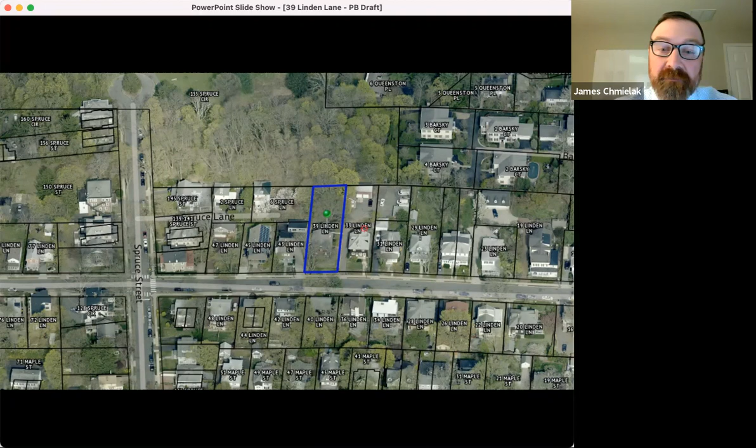And then this is an even closer view of the aerial. You can see the adjacent structures, as well as 33 to the right, which also has some commercial element to it and is multifamily. And then you can see some of the massing of the other buildings there in the local neighborhood.

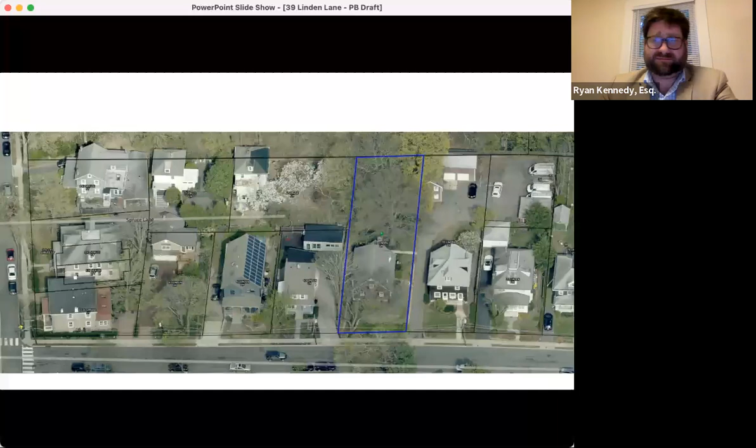Jim, as we get into this, particularly this corner of the neighborhood, there's, from a neighborhood density perspective, many of the lots have been kind of cut up with a front-back feature, where there's a home or units kind of on a second lot behind a half-sized lot that fronts Linden. Yeah, you'll occasionally find that in this neighborhood.

I have a couple slides on the original site plan. You want to just quickly talk about it, and I know future slides show this better graphically, but we'll quickly take us through the original submitted plan. Sure, so on the left-hand side we have Linden Lane, and then the frontage of the building there. The building is approximately 23 feet wide and approximately 80 feet long, with 3 separated units and a proposed driveway on what would be the northerly side, adjacent to the existing single-family residence and their own driveway on the original plan between the property line and the proposed building. We've also provided an ordinance-compliant, from the attached dwelling standpoint, 3 parking stalls at the rear, with an open space area in the lower right-hand corner of the lot in the backyard. This would be 3 units of approximately 1,300 square feet each.

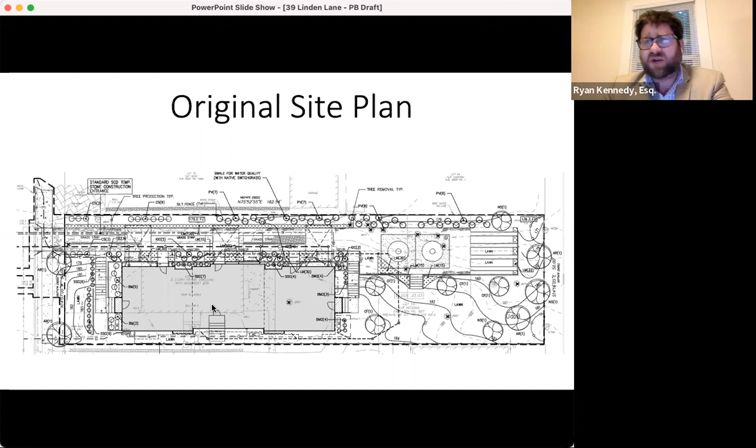It's proposed, correct. Now, I don't want to dwell too much on this original plan. However, there are 2 ways of looking at this type of configuration, and we were guided by staff essentially to look at this as attached dwellings, which has a different zoning set here versus multiple dwellings. But we have here both sets of zoning requirements on this. It makes a difference, I suppose, as to which one it is, but we'll focus on the changes of the project here rather than the specific details of the original plan.

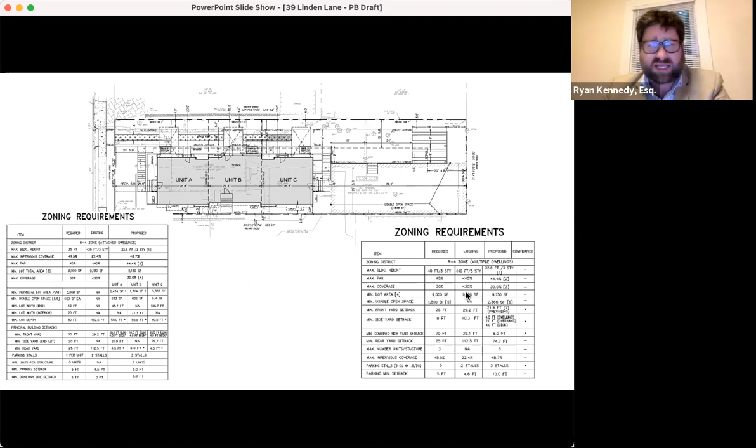But ultimately, on the left, Jim has the zoning bulk table, if you were to look at this as attached dwellings, kind of turned sideways, of course. On the right is what the bulk requirements would be if these were multiple dwellings, treating it as an apartment building. Jim, is that correct? Yes, that's correct. From the multiple dwelling standpoint, we only had a few variances. From the attached dwelling standpoint, they're more significant looking at it in that context.

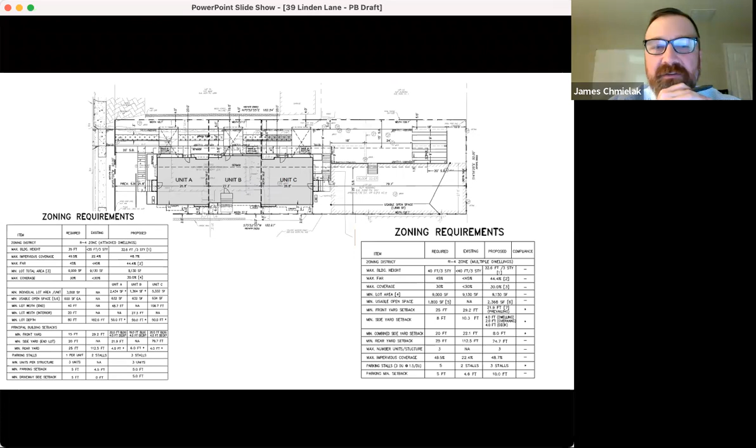So looking then, getting to the heart of what the proposal is, Jim, you want to walk us through the front view?

This was the original proposal fronting to Linden here where these steps are in the front. That was access to Unit A, and the access driveway was to pass underneath the elevated decks on the left-hand side of the structure to the parking area at the rear.

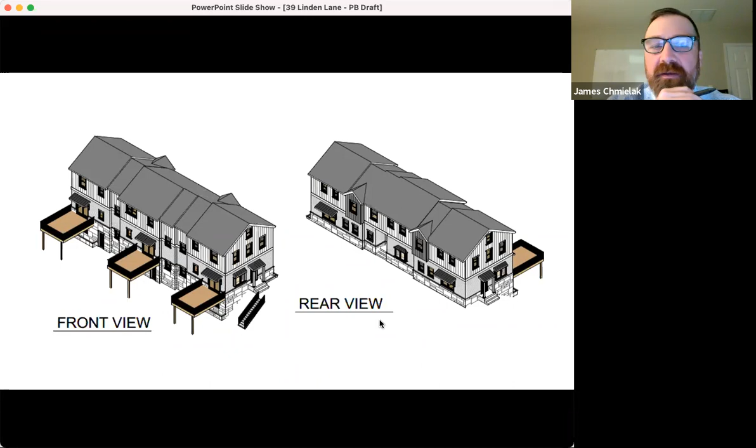Some of these entries, in terms of negotiating the topography with the revised concept, address these particular layouts from the vertical standpoint of the building and the adjacent grade, the facade exposure, and building massing. So this is a good comparison as to where we're going with the modified concept.

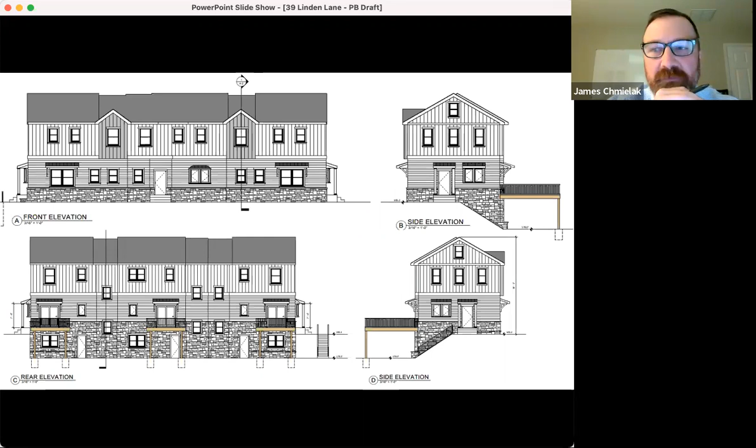Maybe not dwelling too much here, but these are the elevations. I think what's important is that the originally proposed outdoor decks for each unit were proposed to come within 4 feet of the property line, necessitating a side yard setback, and they were about 15 and 16 feet wide depending on which unit you were looking at. That's an element of the revised plan that was significantly reduced, to pull that particular element away from the property line and create some increased buffer space.

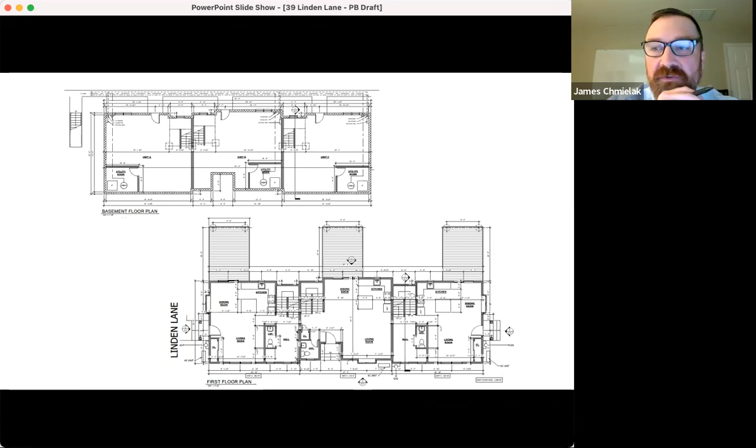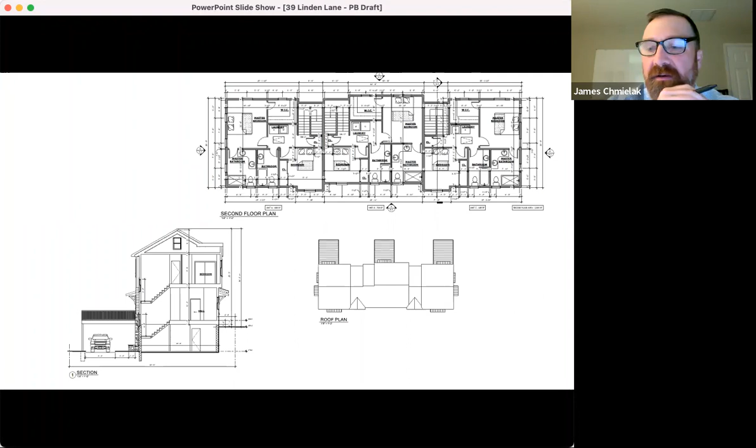There was some concern about having to provide protection on the vertical piers and posts for the elevated decks in and around the driveway, going underneath those decks. With the revised design, that was an element that was pulled in closer to the building and addressed for comparison's sake. So this next slide is a rendering from that front Linden corner.

The one thing you perhaps can't see in this rendering is that currently that's kind of an impossible view because there's a privacy fence along this property line, but it wasn't rendered that way, so you could have an idea of the grade change and the placement of the driveway and generally the materials planned for the property.

So we did, as I mentioned before, attend the last SPRAB meeting, and we had a very healthy discussion with them, including some discussion about things that are still being grappled with as far as ADUs go.

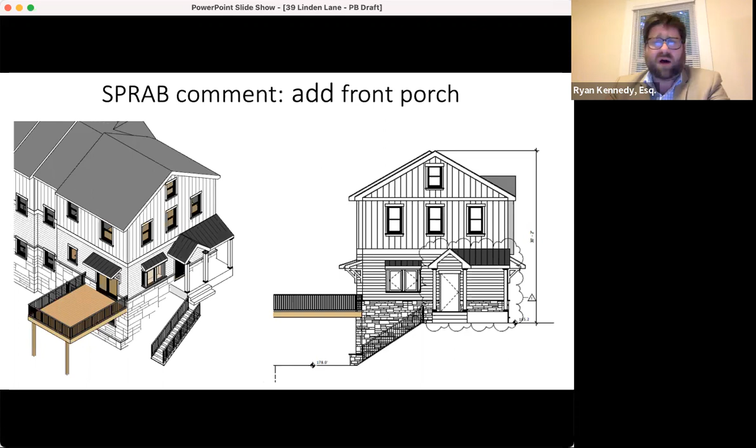Jim, I'll let you talk to this one, the original design had... well Jim, I want to let you talk about this change. Right, so this change was to address the SPRAB comment. Again, we have the porch, expanded in the front. The gable was added to that, and then the footprint was expanded. We extended a more distinct walkway to the entrance on the side.

And then in the rear, specifically, the largest change was to provide 3 stalls facing the rear property line with a turnaround area, so that all the vehicles would be easily able to pull out of the driveway onto Linden Lane in a forward traffic movement instead of encouraging reverse movements. So this change addressed that. That was pretty significant in terms of the comments, so we expanded that area.

That did increase the impervious coverage above the 49.5% to 52.5%, where previously the impervious coverage did comply, so relief would be necessary for that. But that particular element plays into the revised concept - we made some modifications to that, still maintaining the back-out ability and the forward movement ability as well.

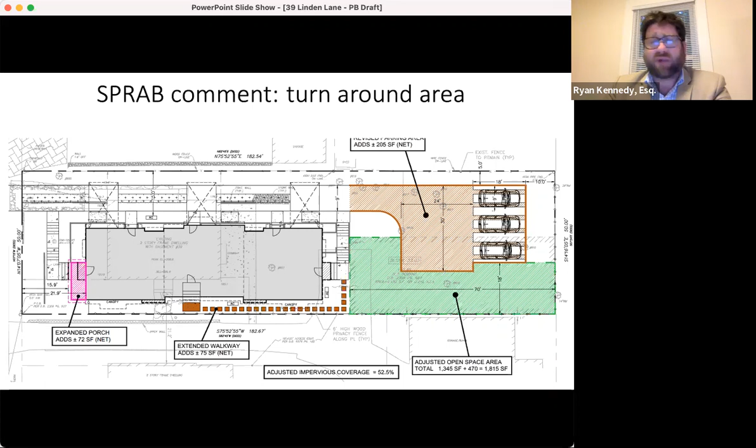So this comment from SPRAB, Jim, was essentially that the original design had the occupants backing out this driveway back to Linden, and there was a concern about navigating the piers from the deck features. By adding the turnaround area, that removed the need to navigate that and had a much simpler in and out operation. Correct. All right.

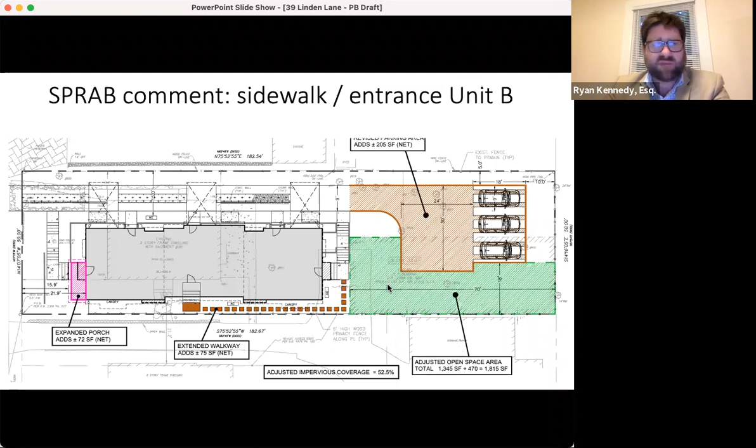The next comment we had was on this middle unit. The primary entrance in the original design was from the driveway side. We heard that perhaps another entrance, or a way to get to the open space to the rear, would be helpful. So that's something we accommodated as well.

But then we got to the bigger comments. Obviously there are some members of SPRAB here, but one of our takeaways was that looking up and down this street and this corner, the number of units was perhaps appropriate. If you looked at the adjacent properties that had duplexes with units behind them, detached garages used for other purposes, or subdivided lots behind them with other units, having 3 units here perhaps was not inappropriate.

But we heard that the site configuration perhaps wasn't necessarily what the board was feeling fit with the neighborhood entirely. So we looked at that, and for those of you who were there that night, we had a really nice discussion, and some of the things went to looking at other types of properties on the street.

And thinking duplicating those would make sense. Some of us immediately went to, well, there's many duplexes on this street — why couldn't you do a duplex with an ADU behind it? I was listening quite astutely to the revisions you guys were just talking about to the ADU ordinance. And while I think Mr. Muller's scenario with a zero lot line duplex and ADUs is interesting, it doesn't solve what we talked about with SPRAB, which is that a 2-family cannot have an ADU.

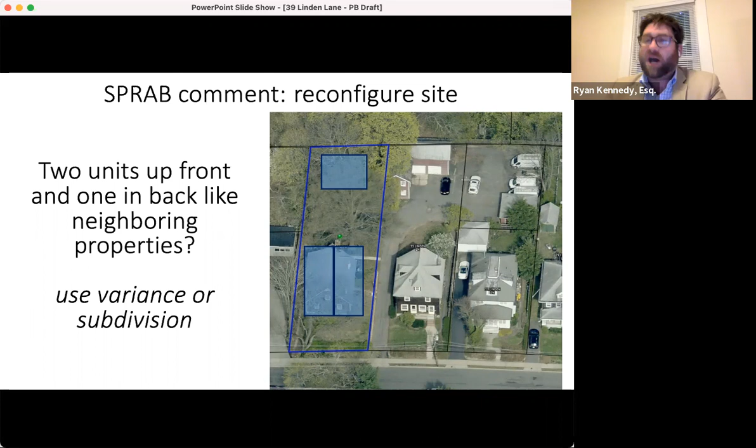That was one of the things we heard from SPRAB and kind of noodled around how to deal with. Unfortunately, while we're hoping to get some input from you on something like that, I caution everyone that even if everyone on this board thought that was a perfect arrangement conceptually, we would have to go back to the zoning board. This board couldn't hear that type of arrangement because the units aren't touching — that would be a use variance, or D variance, that this board couldn't hear.

So what we took away from there was, first, the perception of height for the project. It's hard from this photo to tell, but there is a significant existing grade drop right to left here, and it was thought this was exacerbated by the site design — but maybe there were better ways to accommodate that grade with our project.

I'm sorry to interrupt, but I think the grade drops — yes, you're right, sorry, right to left. We'll have some upfront photos that show that. Yeah, it's quite severe. By having the driveway as we proposed on the left — while it didn't actually, some of the initial thoughts were, gosh, did you regrade the site that way, or cut it that way to make that happen? Actually not, but it does appear that way because of that grade drop. So maybe we recenter the property, maybe we look at other ways for the driveway to handle that.

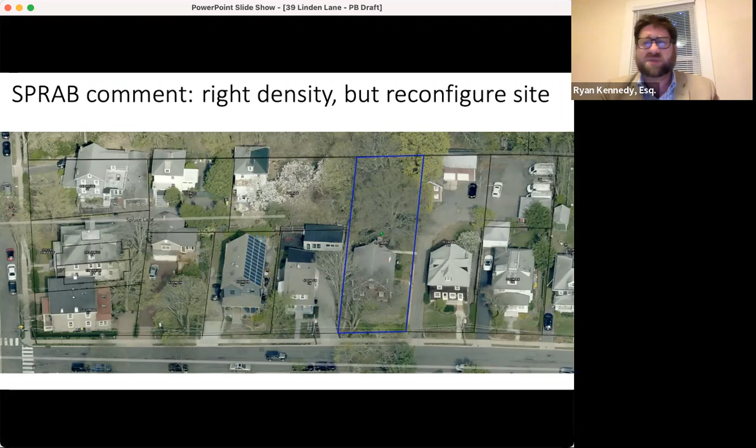And similarly, as you can see here, historically and by deed easement, there's been a shared driveway with the current or the prior home at 39. Can we take advantage of that? Is there a way to use that and have less coverage? Is there a better site layout that happens from that?

And then finally, the orientation of the front doors, particularly for the middle unit. There was some discussion and concern that the front unit that fronts to Linden made sense. I think there was some thought that the rear unit that kind of is accessed from the backyard made some sense, but that middle unit, how does that relate to the rest of the project, to the neighborhood? So we put some thought into that.

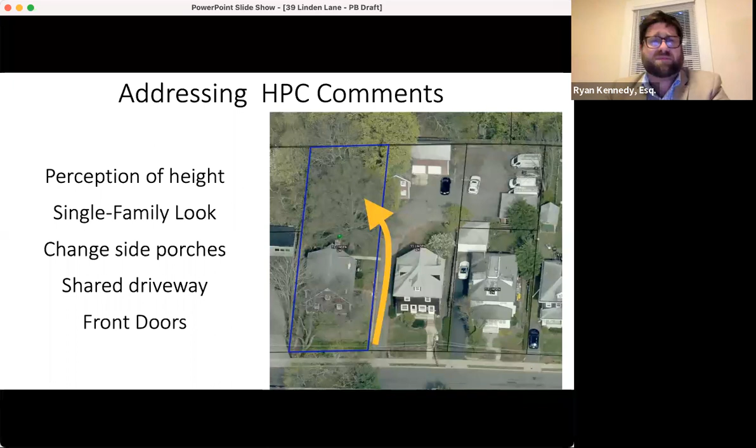I'll lean on Jim here a little bit, but we've got some side by side, left being our kind of original site plan that we tweaked after SPRAB with the new driveway plan, and then what we're calling our alternative design here, which is the shared driveway version that we're going to be talking about tonight, and seeing if this is a design that this board thinks is worth us advancing, and what other feedback we can get on it.

So based on our visit with HPC at their courtesy review, this has a bunch of advantages. One, it's less coverage than even initially proposed. It does take advantage of and use the shared driveway. We feel that that's perhaps a benefit, not just for coverage, but these are very narrow lots here. It both allows a better site layout and a better understanding of, or better relationship to, what's there now.

Jim, I think you can see here, but it shifts the building. Some of the comments we initially got from staff was that the original configuration, while it was close to a driveway on the right side of the building, was close in terms of setbacks, and this arrangement allows the building to be more centered in the lot, which has a positive impact on the setbacks on both the left and the right side, and that would allow one of the units to be oriented, as we'll show you in a minute, to the shared driveway, as the current house is now.

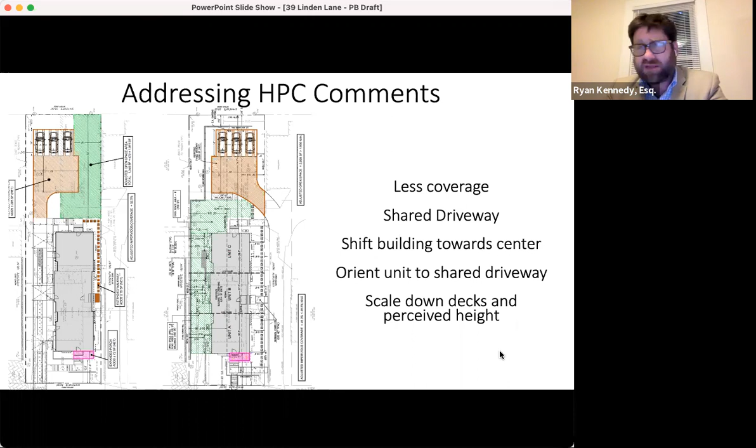This, interestingly, 39 Linden Lane is the one family that was there, turned sideways, oriented to that shared driveway. So using the shared driveway would actually allow Unit B to mimic that existing arrangement, and then the front unit have a more traditional front porch fronting the street, and the third unit addressing the back of the lot. And then finally, we heard that the decks were not something people were used to seeing in Princeton. They were quite elevated, based on both the topography that slips, that dips from right to left, as well as putting the driveway underneath, which required that they be a certain height. And we heard that loud and clear, and took that off the table.

Jim, you want to maybe quickly take us through? This is our revised concept site plan.

Yeah, I guess starting at the left on Linden Lane, you can see that the porch still is proposed as being modified and expanded. And then there's a sort of descending walk down to the street, which is similar to the context of other homes on Linden Lane. But really, as you look at the shared driveway, each of the units does have a pedestrian access and sort of embraces the driveway access more than it did previously, with the sidewalks getting to each unit.

And then basically we have more open space and green area in the backyard and to the rear of the units where we've shifted the building more towards the center of the lot, which makes the smaller setbacks previously proposed less acute. I think it's 10 feet proposed from the side property line along the shared driveway.

And then we have 15 feet at the rear of the property. Those decks, where before they were 15 and 16 feet, are actually reduced down to more open air balconies at 5 feet wide, just to give some air and outside space for a 5-foot width in the back of each of those units. So they're significantly reduced. And then we have the parking area at the rear, where the parking spaces are facing the rear property line, using that access that exists adjacent to the garage and the barn currently on 33 Linden Lane.

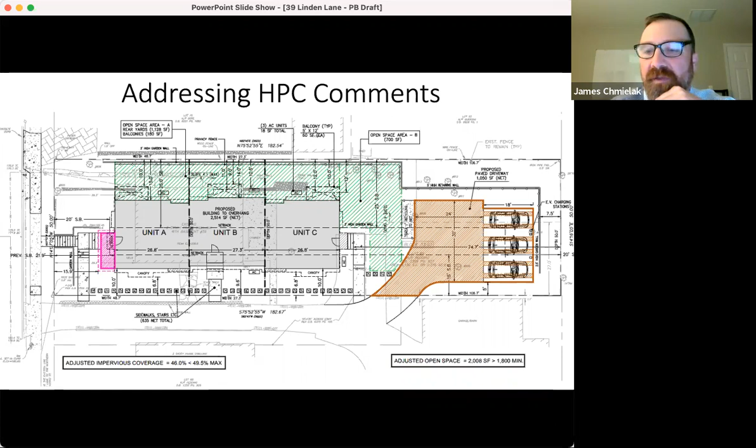So looking from left to right here, left was the original design that had a driveway going under these large decks that were quite close, necessarily because of the topography, relating to the property next door being fairly tall.

To the right, the revised design has much smaller decks, porches, or balconies, and the creation of a true front porch for the front unit. We spent a lot of time on this - we felt that the gable on that front facade was reduced to a hip roof in the front, so the architect added that element in order to reduce the overall perception of height and building mass relative to what's visible of the front facade, which is significantly reduced with the new design compared to the gable roof on the front of the facade in the prior design.

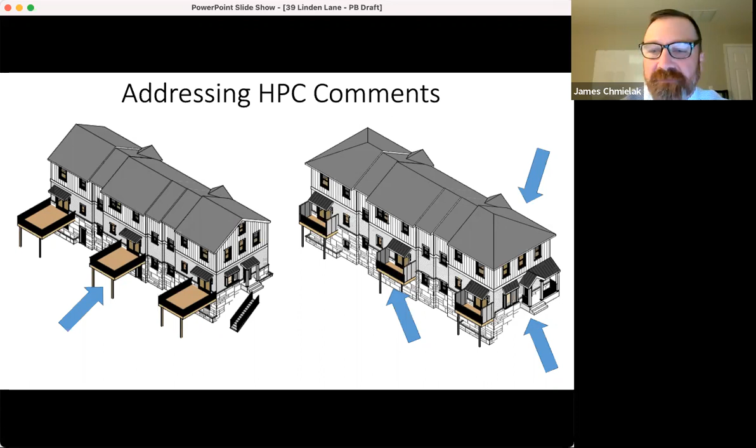Again, another view here showing the various changes - the chopping down of the large decks from the left, the creation of a front porch for the front unit. We think this scales down the streetscape, bringing the front unit to a more neighborhood scale with that hip roof. And here from the side profile as well, showing the areas where those changes were made.

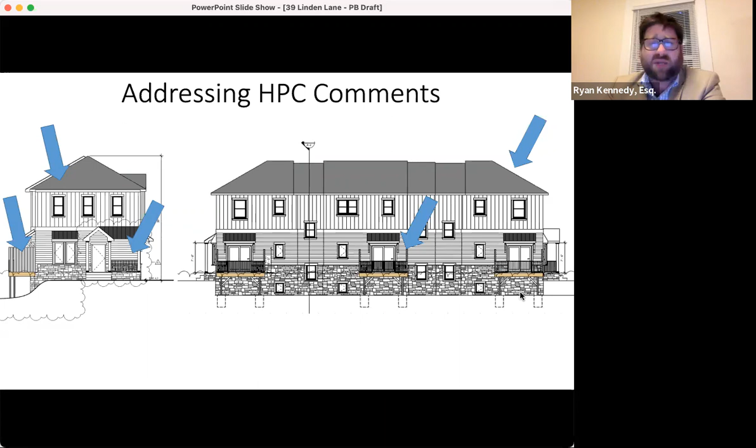It was our understanding that this elevation, because of the topography, was the one that was most difficult for HPC and SPRAB to wrap their heads around. By removing the driveway, we were able to pull this scale down - there was no longer the need to have cars' length or height of clearance underneath, and the grading was able to be much more scaled or adjusted.

We also made a crude attempt here to talk about that middle unit and how it addresses, as a front entrance, the shared driveway. On the right was the existing home, the prior home there, that was interestingly always kind of turned sideways and addressed that shared driveway. By incorporating the shared driveway into the design, we were able to have a meaningful relationship of that middle unit, similar to the current house, to get in there.

The front unit would still front the street with the front porch. The middle unit would front the shared driveway, kind of like the red house at 39 Linden does here on the right. And then the back unit would address the rear of the lot.

Just two points on that. Both the front and rear with this layout would still be pedestrian accessible from the rear parking stalls, which I think is important. Also, when you look at this picture at the right of the Cape Cod, I spoke of it as a single family dwelling. I believe the tax records in the past do indicate it was inhabited as a two-family, so I was really focused on it as a single family. It's more of a traditional Cape Cod structure, but I wanted to clarify that.

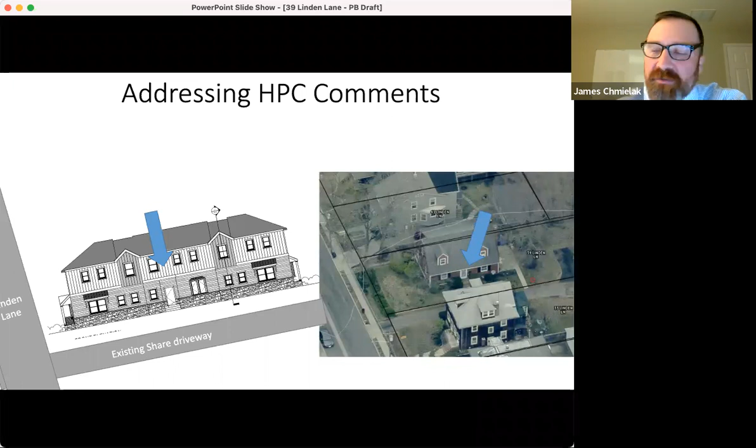So with these changes, there are still variances needed. It is a tight lot, but Jim, if you want to just quickly list through the type of relief that we would need, and then relative to the other design, tick off which of the things we were able to make go away by addressing these comments, coverage being the biggest one.

Right, so in terms of maximum impervious coverage, that was further reduced beyond that SPRAB plan with the turnaround area down to 46%, which is well under the standard. The maximum building coverage was also reduced. I think previously that was at 30%, and that was reduced down to 27% and change.

As I mentioned before, in terms of the setbacks, where before we had the smallest side yard setback down to 4 feet, and there might have been an interpretation by staff with an overhang of possibly 2 feet, with that interpretation we're looking at increasing that to 10 feet to the deck and 6.8 feet to the furthest extension of the building. So that's an appreciable increase. Would still need variance relief for that.

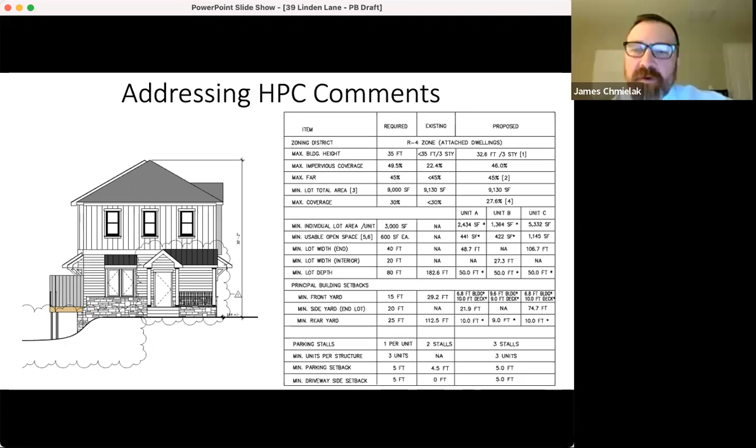Correct. Yeah, and along those lines too, it would comply with the overall density of the lot, with the 9,000 square feet required and 9,100 provided. So based on the feedback we got, this is, I think, until Mr. Quinn's group is done with the 2.0 version of what SPRAB or whatever will replace SPRAB will be.

We did our best to listen to their feedback and HPC's feedback and put that into something that we think achieves the goals of both the applicant and what we hope that the town and the board are looking for. And with that feedback, we certainly get less coverage from our prior plan.

Their comments helped us get to an improved pedestrian access, shifting the building to the center of the lot, addressed the setbacks positively. Again, by using the shared driveway, we're able to orient that unit similar to the existing house to that shared driveway in a way that we think makes a lot of sense. We reduced those decks to something that perhaps is a more appropriate scale, both in height and size.

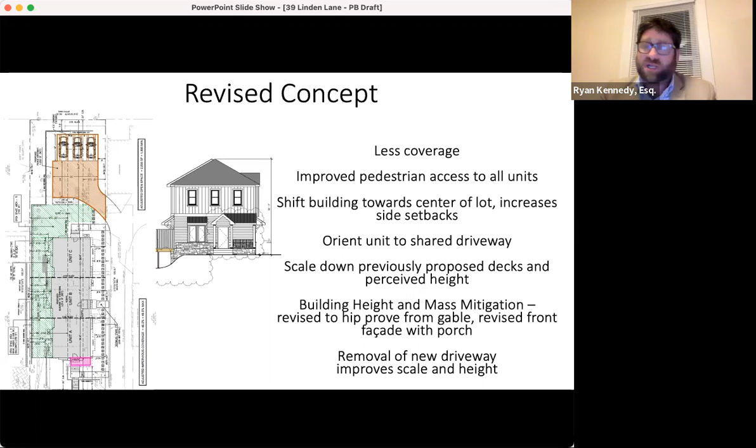And similarly here, we appreciate the opportunity to make the changes conceptually to what we think gets us closer to the feedback we've received from your former advisory boards, before needing to fully have a complete package. That obviously takes a lot of time and money. And if it's not the direction that this board sees the project being appropriate for the project in the neighborhood, that would be an unfortunate use of everyone's time and resources.

Yeah, so I think we understand what you're saying, Mr. Kennedy. Are we ready for the board members to pose questions? Is there anything else that you have to present? That's essentially it. We have a few more photos of representative homes on the street, but I think you've seen and heard what we'd like you to see about the iterations here.

Okay, I see. Mr. Cohen? So I guess I'll give the good news first, which is I'm really happy that you decided to avail yourselves of the concept review. It's something that I wish more applicants would do. I think it's a good way to get feedback from the board.

I'm also, you know, you clearly listened to a lot of the very specific concerns about the earlier application, but I think that I still have just a super serious reservation about this whole idea of attached dwellings that are oriented perpendicular to the street instead of parallel to the street. And...

You know, I totally agree with staff. I mean, you look at the definition of attached dwelling in the ordinance, and there's no way that you can claim that this project is anything other than attached dwellings. They're single family units with party walls in between them. That's the definition in the code. That's what you've got here.